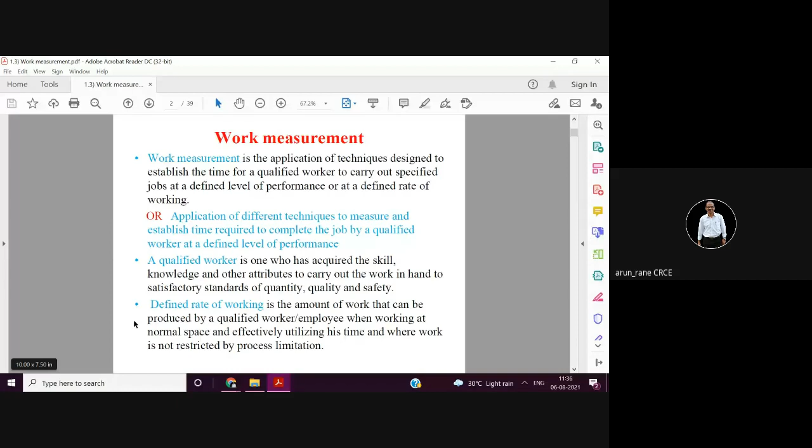So this is what is called the defined rate of working, can be asked for 2 marks. So work measurement is the application of techniques, as we learn different techniques, designed to establish the time taken for a qualified worker to carry out a specified job at a defined level of performance. This is the definition you need to remember.

So what it means: find out the different elements of the production processes, find out the time taken by each element. As I have been telling again and again, there is something called therbligs - you have to divide your work into small elements and find out the time taken by each element, and then fix up the standard time for performing the production process.

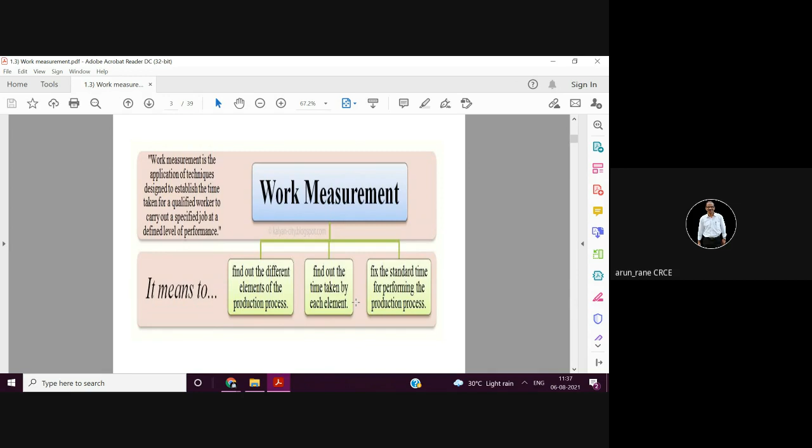There is something called the standard time, something called the normal time. So both the times are different.

The objective of work measurement is to reveal the nature and extent of ineffective time, that is, the non-value added time. You identify the cause and take corrective action to reduce that ineffective time, and set standards of performance which are achievable.

Whatever work has been assigned or time dictated should be achievable. That's why we take time study, to see whether the time given by the industrial engineering department can be achieved. Once the time study is done and actual time is taken, with mutual agreement between union and management, the normal time is fixed, and based on that incentive schemes are decided.

So the objectives of work measurement are many: you can devise alternative methods, you can assess the correct initial manning, meaning you allocate the manpower.

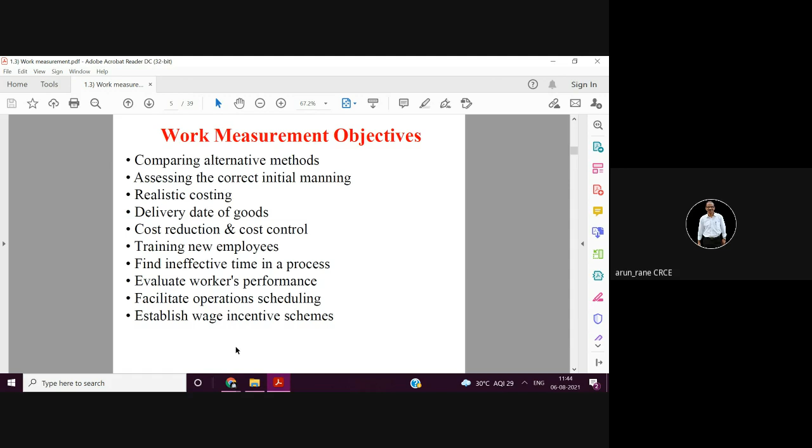Then based on this time, performance, you can come up with wage incentive schemes. And as I told, incentives are very important. I have given an example of BEST conductors, and if you observe the ticket carefully, there you might have seen 15 paisa. Like suppose if the ticket is 6 rupees, earlier tickets, not nowadays machine printed tickets. Earlier when you used to punch the tickets, if you have those tickets, even nowadays printed tickets I have

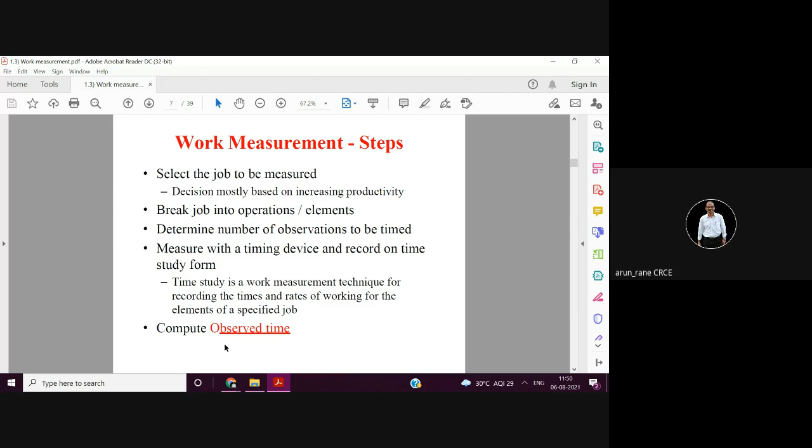And then you get observed time. So there is a difference between observed time, normal time, which is also called the basic time, and standard time. See this, you have to remember, this is always asked. So once you have observed time, with the help of the stopwatch, then you can calculate the normal time by using performance rating factor. Like every worker has been assigned a rating factor, worker A, worker B, worker C. So normal time is calculated. We will see an example on this, so that time it will be more clear.

Then you have to add some allowances in this. This is the observed time. Based on that, you have calculated the normal time, and then you add process allowance, rest, fatigue allowance. Rest allowance is also called the fatigue allowance. Then personal allowance. Personal allowance means like going for the washrooms, etc. And special allowances. Some special allowances to this normal time in order to get the standard time. So you have observed time, normal time, and standard time.

Then you have to define the new method. If you have suggested some alternative method, then install that new method. And most important is maintaining. Maintaining is always important. You can take a 10 lakh car, but you have to see whether it is possible to maintain or not. Fuel prices are rising, then breakdown maintenance, preventive maintenance, kilometer maintenance, 105 rupees per liter. So whether it is possible to maintain, and whether I am going to use it, I am going to get returns or not. That is what you have to see. It is easy to buy, but it is difficult to maintain, because there is no point investing 10 lakhs, or taking a loan of 10 lakhs and paying 10,000 rupees per month as EMI, and not using it. So that becomes a white elephant.

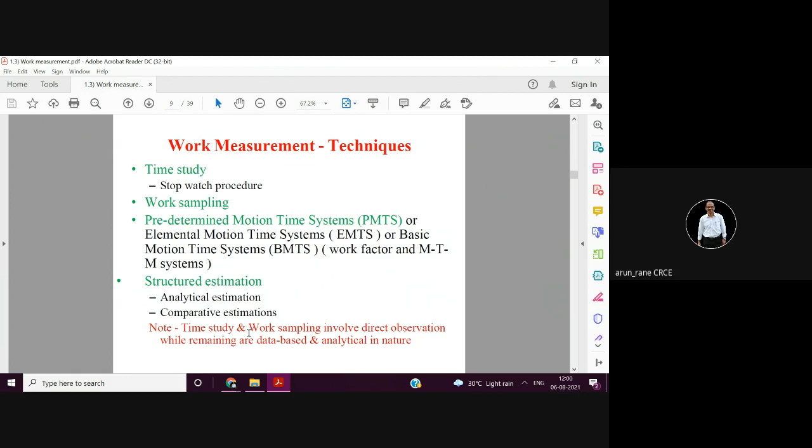Then you have structured estimation. In structured estimation you have analytical estimation; MOST is a kind of analytical estimation. And comparative estimation means you already have some historical data, so you are comparing the new job with the old job. What is the difference? Suppose in the old job, turning 100 mm length takes 1 minute. Now you have a new job whose length is 150 mm. So the time will be 1.5 minutes. This is called the comparison method.

So these are the different techniques, like the historical data method, which I told just now. PMTS, the most powerful technique nowadays. It will be used, and very soon it will be digitized. Then you have work sampling, where workers are observed many times and randomly. Time study, where the engineers use a stopwatch. And why was time study failing? Because the workers were not cooperative. There were threats given to the engineers.

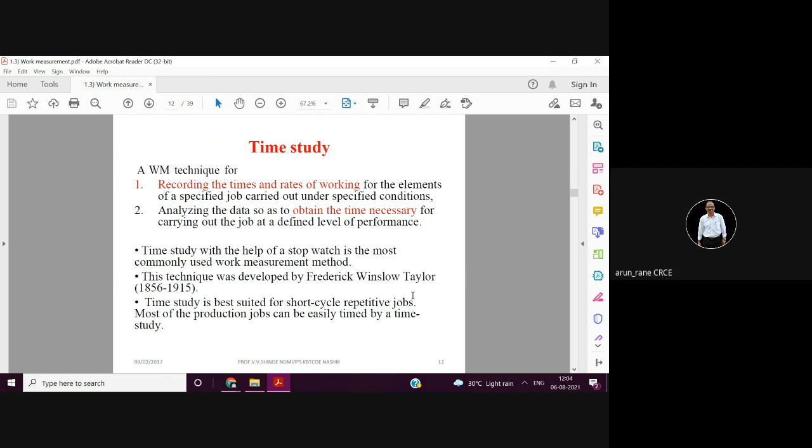So here in time study, we have to stand there on the shop floor, and this was developed by Frederick Taylor. And as I said, it is useful for your short cycle repetitive jobs. This procedure remains the same as what we have seen in the method study, that is select. Select means select the job, what is to be done, then obtain the data, record it, define, measure it, then if there is any alternative method, you determine that. Okay, establish that alternative method and then compute the new time.

So obtaining and recording all available information. This is the first step in time study. That is, you are obtaining the information about the job. You have to study the job properly. Not only that, you have to also obtain the information about the operator. Then ergonomics, that is, what are the surrounding conditions. So that also you have to understand.

Like suppose if it is summer and you are doing the time study in heat treatment, which is long cycle jobs, or if you are doing a time study in your cleaning, that is in your galvanizing section, in summer. So there you need to study the ergonomic conditions, that is surrounding condition, how it is, whether it is slippery, whether it is hot, moist, all those, because that has to be recorded down, because that affects the time. So the time study which is done in summer in a galvanizing department and in winter will give you different times. So in order to analyze that, you need to have the record of surrounding condition.

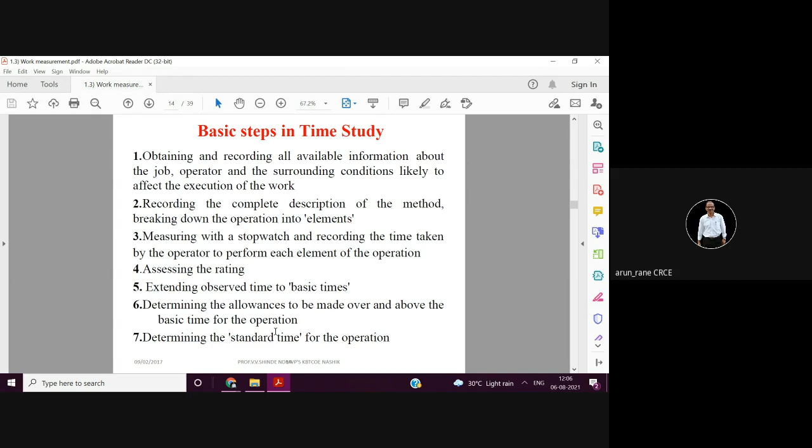Okay, so the fight occurs here in the standard time. That is, what kind of allowances you have to give, how much allowances you have to give. So there is always a tussle between union and management.

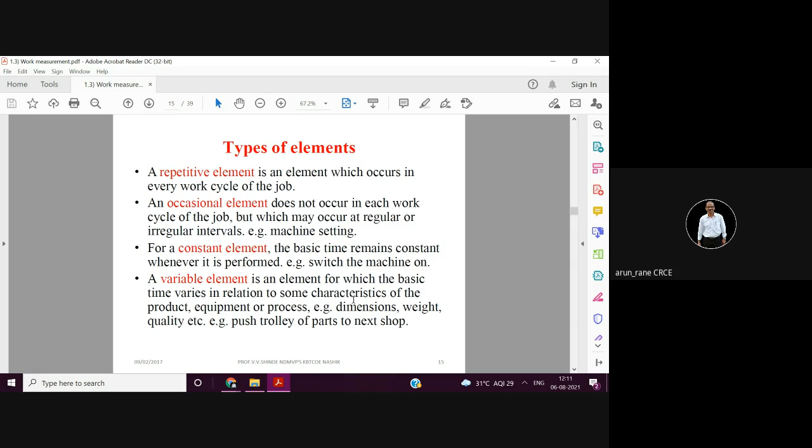The variable element means it will vary as per the product, equipment or process. Like suppose the raw material allowance is more, or there is a hard spot, or pushing the trolley to the next shop. These are variable elements for which the basic time will vary. It may not remain the same.

So again we are discussing the types of elements. A manual element is an element performed by a worker. Then we have the machine element, meaning the work done by the machine. The governing element is like a bottleneck element, the element which takes more time.

Suppose 4 of you are walking from Father Agnel College to Bandra station. If one boy is slow, then the time to reach Bandra station will be decided by the student who is walking slowly, taking the longest time. So he is the bottleneck. You have to identify that bottleneck. Why is he walking slow?

Whether he is not feeling well, he is sick, he has fever, or he has some problem with his legs, or he has not taken breakfast, or he has not eaten, so that's why he is feeling hungry. So, same thing applies here.

Bottleneck elements you have to identify in a particular sequence of operations in a particular assembly line, and you have to see that bottlenecks are removed.

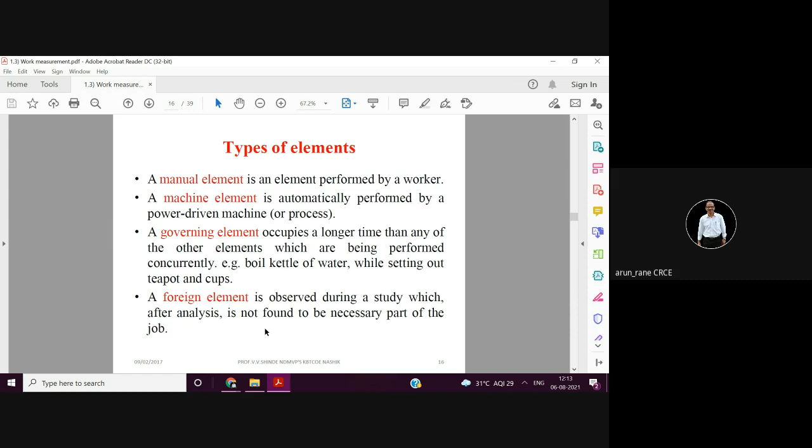Then a foreign element is observed during a study. Foreign element means some dust comes, dirt comes. So sometimes foreign element can even be things like power going off. That is also a foreign element, right?

So performance rating, again here there are some clashes that take place with the union. Performance rating is nothing but a step in work measurement in which the analyst, like an industrial engineer, observes the worker's performance and records a value that represents his performance relative to what the industrial engineer's concept is.

What is in his mind is that this job, as estimated by his senior or manager, has been told will take say 5 minutes. So that is what is standard performance. With respect to this, if the worker is taking 6 minutes, that means he is taking 20% more, so his performance rating will be 80%. If he is taking only 5 minutes as told by the manager, then his performance rating is 100%.

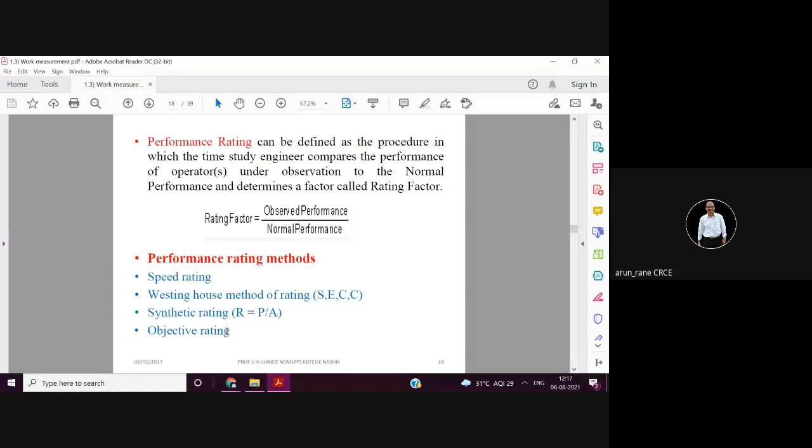Then pace rating is nothing but the speed rating, the Westinghouse system of rating. It considers 4 factors. In pace rating, we are considering the speed of the people - some people are very fast, some are medium, so speed is measured in pace rating.

This is very important. Pace rating is very important when there are assembly lines of the moving conveyor type. Most assembly lines are moving conveyor type.

What happens in a moving conveyor? The conveyor is moving. Suppose there is a lengthy conveyor, say 100 meters, with 30 workstations. So the person working at workstation 1 has to move along with the conveyor. Remember, he has to move along with the conveyor.

I'll make a call, the lecture is about to end. So he has to move along with the conveyor.

Now what happens? The conveyor speed can be changed, slow or fast, depending upon the work content. If the manager wants more production, he will increase the speed of the conveyor. So people have to move with the conveyor, do the activities fast, and then again come back to their original position for the next or subsequent job.

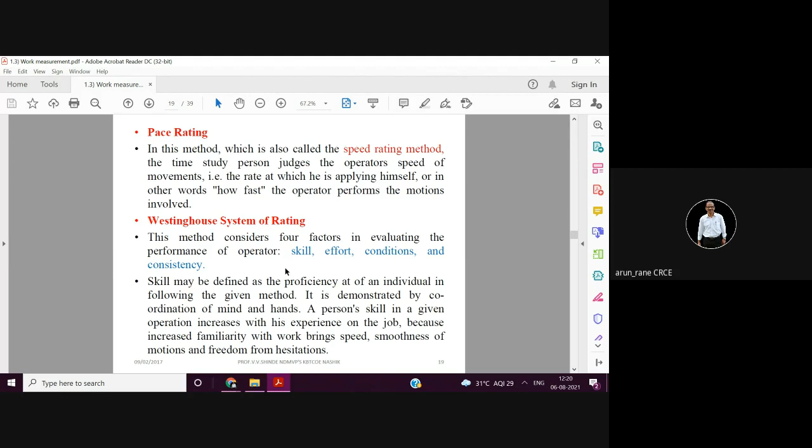Then there is the Westinghouse system of rating. This method considers four factors in evaluating the performance of an operator: skill, effort, conditions, and consistency. Most important is consistency.

This is what, sir, we are not able to hear your voice in the background. Hello, can you hear me? There is some disturbance, some construction work is going on here, that's why sometimes it is very noisy.

Effort, conditions, consistency - most important is consistency. You have to rate high if the operator is slow but consistent. Consistency, uniformity is most important. For example, one operator is very fast and has produced 100 pieces, but out of 100 pieces, 30 are rejected. Another person has produced only 80 pieces, but all 80 are good. So definitely you give a higher rating to operator B.

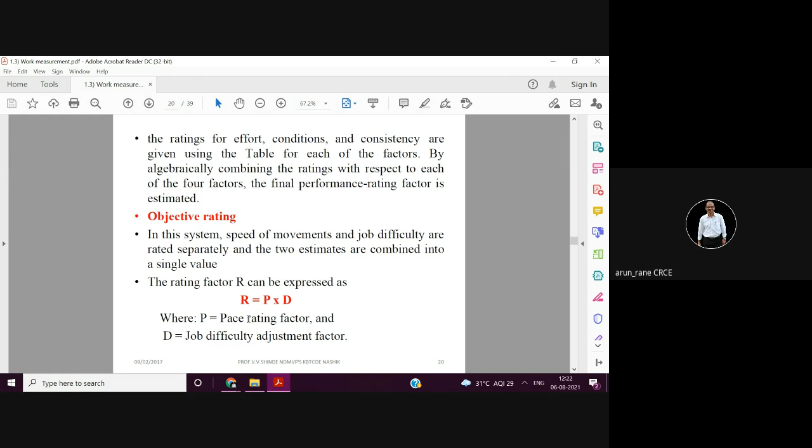Then there is objective rating, where speed of the movements and the job difficulties are rated separately and then combined. The rating factor R can be expressed as R equals P into D, where P is the pace rating, that is speed, and D is the job difficulty factor. So with this you arrive at the objective rating.

Then you have synthetic rating. Mathematically it is given by R equals P by A. Here P is the predetermined motion time of the element, and A is the actual observed time. This comes under synthetic rating.

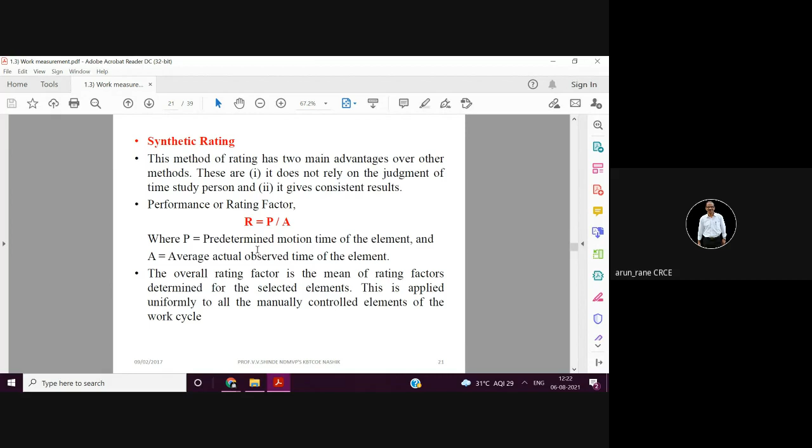Then you have standard time - how to define it. First you have the basic observed time, also called basic time. Then you have normal time, and then standard time. For standard time you have to give allowances. If it is very hot, you have to give more allowances.

That's why people working in air conditioned environments perform better. Standard time may be defined as the amount of time required to complete a unit of work under existing working conditions, using the specified method and machinery, by an operator who is able to work in a proper manner and at a standard pace. So it consists of observed time, performance rating, and allowances.

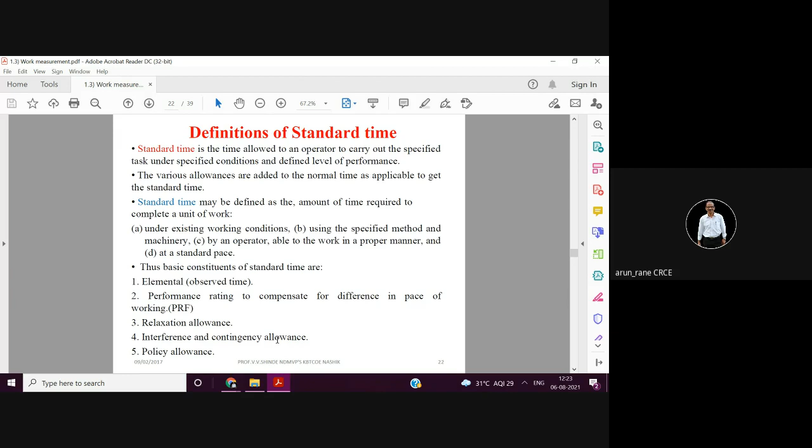Then there is the interference and contingency allowance, and policy allowance - policy allowance means what is decided between the union and management. There are different allowances, like allowances for inspection of the part, and sometimes there are interruptions because of power failure or equipment breakdown, which also need to be considered.

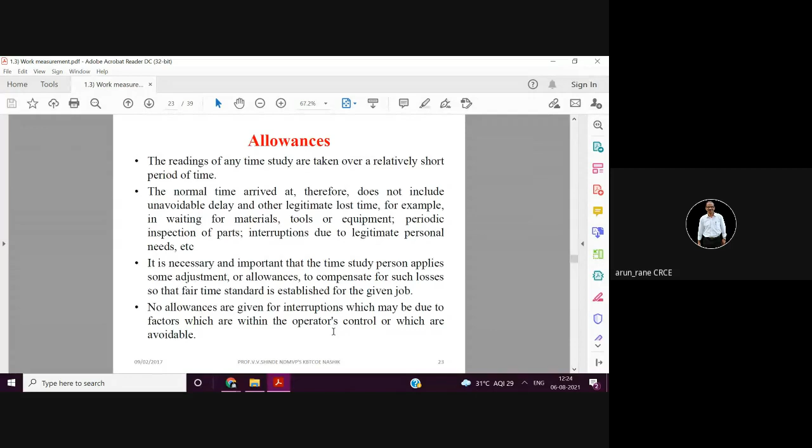No allowances are given for interruptions which may be due to factors within the operator's control, meaning the operator can control it and it is avoidable. So for this there is no allowance. The allowances are classified under this category.